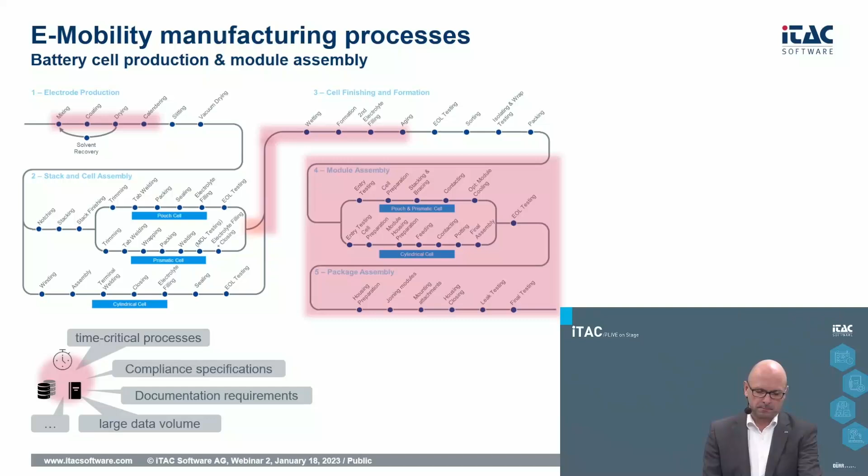Okay, let's have a look into the IoT Edge. I just opened the iTAC workbench, which is a user interface to use the application. I just log in with my user, or a predefined user, and then the system comes up and shows different applications.

I go to the add-ons area, and within the add-ons area we find the IoT Edge. I click on IoT Edge and the software starts. So we are here on the landing page of our IoT Edge, where I have different groups and areas for alarms and so on.

I go to the groups, and there I go to the section for battery production. And as you can see here, if I go into the overview, we see the different processes.

So we have continuous or batch processes, more or less, and you can see here mixing, coating, calendering, and so on. It's a kind of dashboard, and you have an area where you see the previous alarms from the last time.

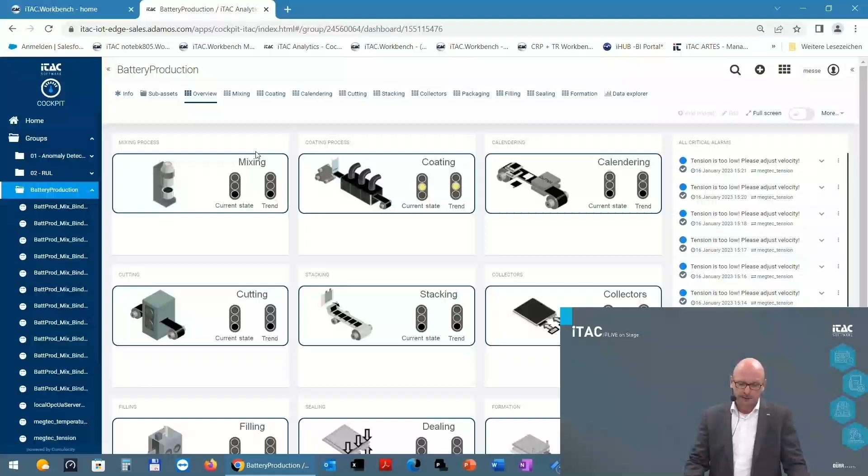If we want to know more details, we can click, for instance, on the mixing area, and there we see the relevant data.

What you can see here are some integration charts and the relevant parameters, like the slurry viscosity, the slurry density, and those are, I guess, some of the most relevant parameters you want to see.

As you can see here, we are collecting the data every second. That allows us, with our device, to collect more than 100,000 parameters or events per minute, which is what you're usually looking for in continuous or batch production.

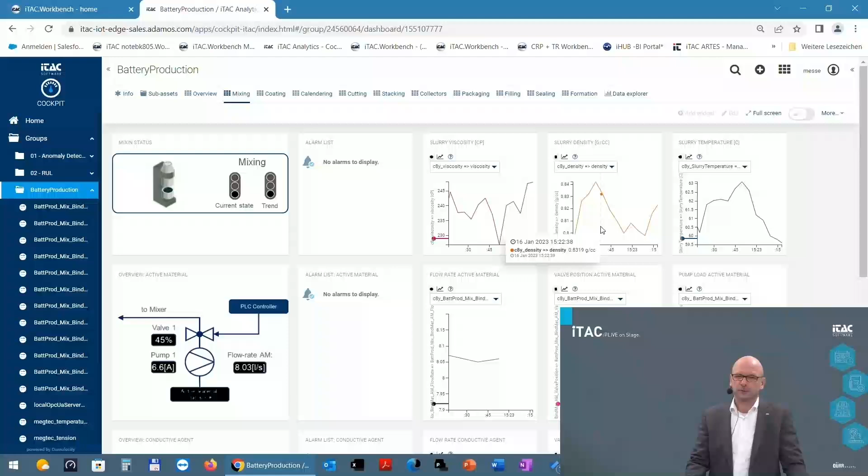You may have noticed that we are working here with a traffic light showing black, yellow, and red. That's due to the fact that we have green screen technology in the studio, so everything that is usually green shows as black in this demonstration. But don't wonder about it, that's just due to the technology.

So right now we want to talk about the electric motor itself and the assembly process, so I will hand over to my colleague Andreas. Yes, thank you, Andreas.

Let's take a look away from the battery onto characteristics of an electric vehicle, for example the electronic control unit and the electric engine consisting of rotor and stator. We can say that these products are already successfully integrated and produced with iTAC. In the following minutes, I would like to show the manufacturing process of these three assemblies and highlight some features and requirements.

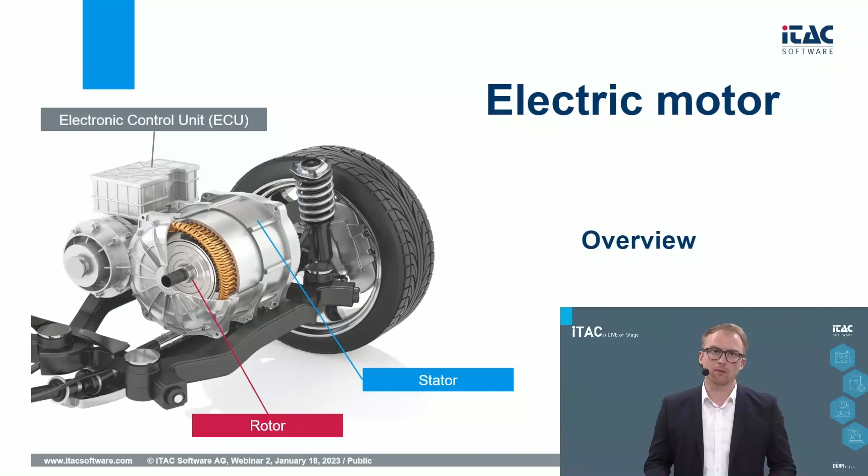What we see here is a generalized assembly flow for the production of a rotor with examples of necessary work steps. Starting with the initial serialization, we can fulfill customer requirements regarding structure and content of the serial number. Usually, company internal guidelines of serialization guarantee uniqueness for the generated ID.

During general assembly, we can identify three different types of components: raw materials, such as the classic screw, nut, and washer; small assemblies that have been pre-assembled by the supplier and serialized; and assemblies that are already being produced with iTAC, where iTAC is aware about the production details of these products.

For raw materials in our rotor line, like the permanent magnets, which are fed to the machine as a bulk material, we prevent excessive batch mixing by only releasing the refill procedure when the reported fill level reaches a dedicated level. Small assemblies with supplier serialization can also be checked via part number against bill of material demands. The existing serialization will be documented in the system in relation to the used master serial number.

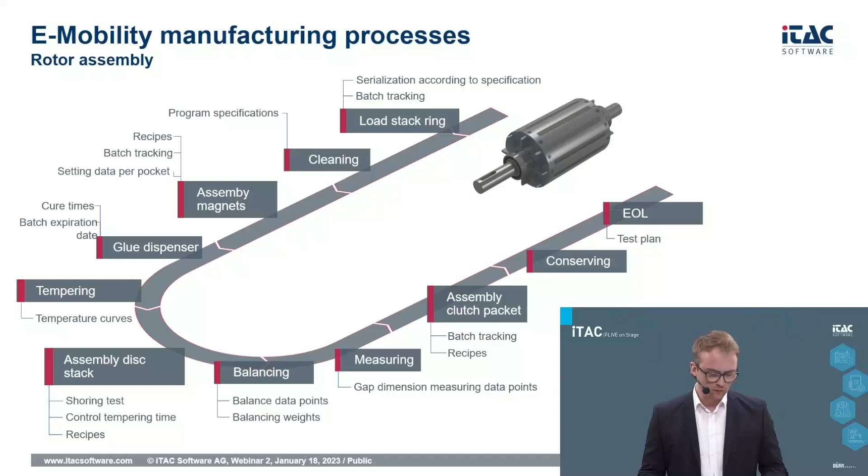Let's take a look at the counterpart of the rotor, the stator. We see similar requirements such as batch tracking and the measuring of temperature curves during heating processes. But also the repeating test and inspection work steps, most triggered by end customer driven quality regulations, standards or certifications. These processes increase the requirements for the implementation.

In future, tools like low-code will be used to create digital worker guidance and ensure the implementation of inspection and test work steps.

In the stator production, as well as in the rotor production, special importance is attached to the specification and documentation of the machine parameters. These so-called recipes are stored in the MES in a document management module and can be read and written by the machine.

Changes by the operator on the machine level are only accepted if the changes are uploaded and confirmed by the MES.

In the production process, special work steps can always be identified that have a particular effect on the subsequent properties of the product, or due to their effect, make disassembly difficult or impossible. These work steps represent milestones and can be classified accordingly in the work plan.

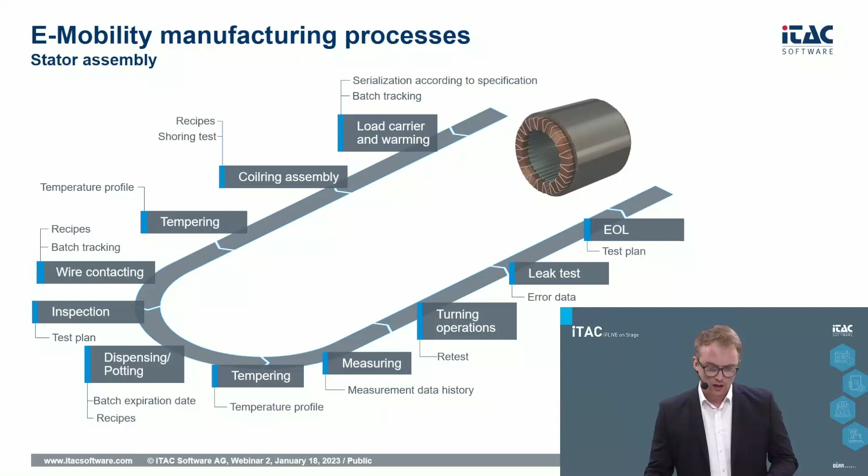If we take a look at the manufacturing process of an electronic control unit, we see a probably familiar process to some of the listeners, the SMT process, where iTAC's integration had its beginnings. One major point is the standardized interfaces with leading machine vendors of this market, which generate a big advantage in integration and communication.

Currently, the integration of such quality evaluation systems has already taken place. iTAC internal solutions, such as the IoT Edge that we saw in the earlier video, can be used, but also the possibility of customer and third-party system integrations is possible.

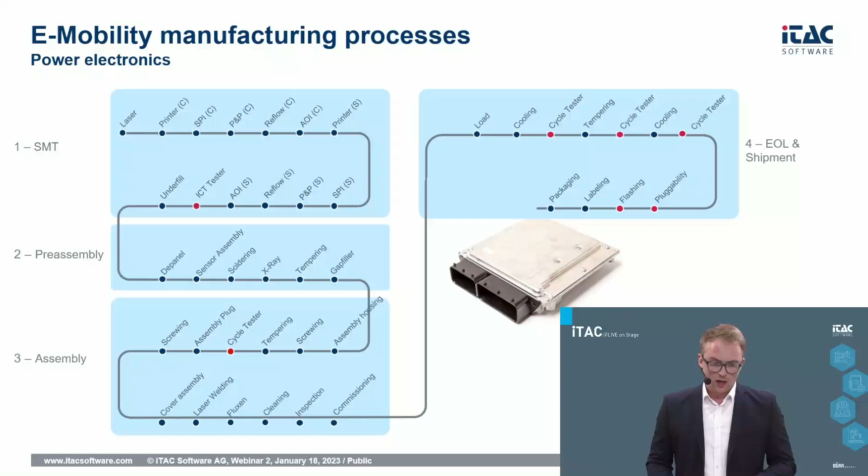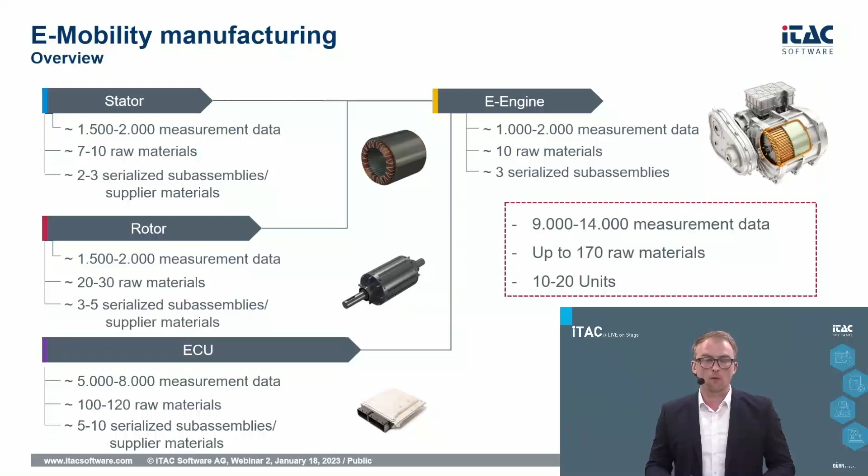Before we take a look at the assembly procedure of such components in the workbench, we will step to the topic of compliance, and I will hand over to my colleague Andreas.

Okay, thank you. Yeah, compliance. What does it mean when we talk about manufacturing process? Mainly we have to talk about the fact that we need to produce according to specification. But what does it mean in detail?

We prepared an example where we have a structure of the e-motor or e-engine. Let's say we have a multi-level serialized production. That is the situation we are facing. If we start with the ECU, then we have for sure several components: the PCB, the IC, the sensor, and tons of other components. All these parts already have part numbers given by the ERP system or by the SAP system.

Such data will be handed over via interface into the MES. So not only the part data, but also the bill of material, the work plan, and the production order itself - it's a whole package. We need it as the base, because that's the master data we need to know - that's the base for us to be able to produce according to specification.

Okay, now the ECU maybe is living, so that means you have to deal with change notes. The change note can be driven by your own development or by your customer, which is forcing a change on the product. That means you have to deal with product versions or revisions. That means the system must handle it clearly and must be able to differentiate older versions from newer versions?

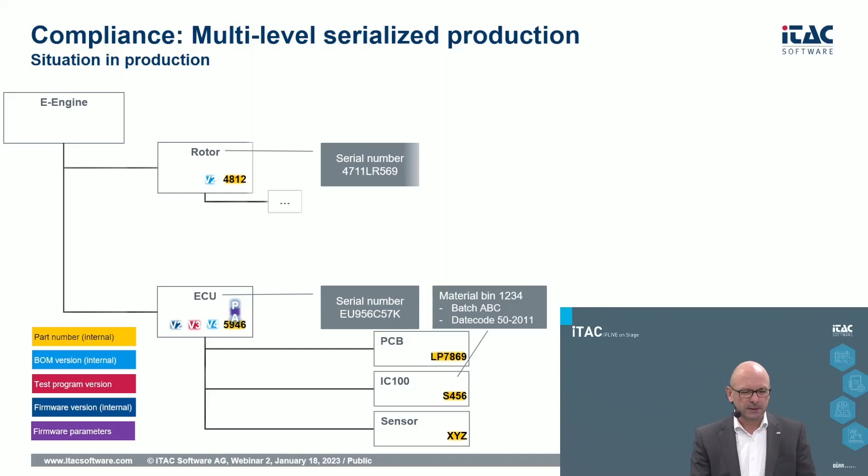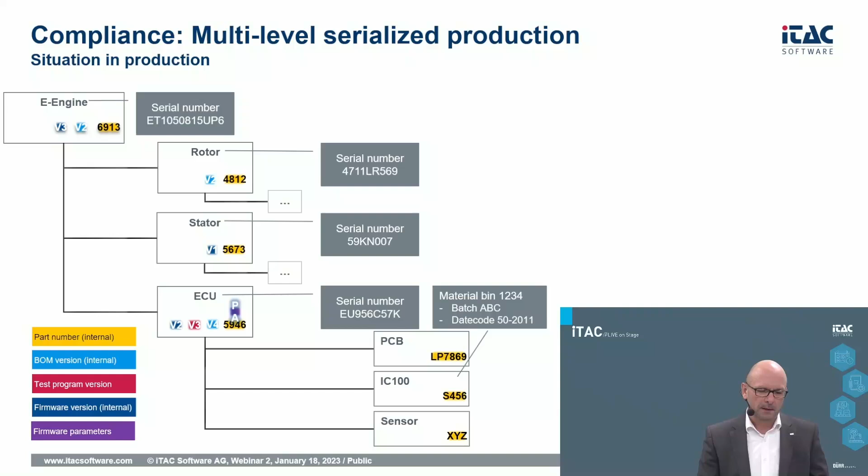And if you look further now at the whole e-engine, we have the situation where we have to assemble the rotor as well - here the same story. We have to manage versions. We have components behind, same for the stator. Also a version which needs to be managed, and on the e-engine level, on the BOM level for the e-engine itself, we have to make sure that only the proven versions from rotor, stator, and ECU can be assembled into the final product, the e-engine. And you maybe have software versions as well.

And what does it mean from the compliance point of view? That means we have to make a setup check - the physical setup of the material needs to reflect the bill of material. So we have a setup verification against the master data. We make sure that we are not using blocked material, because with blocked material you may have a problem with the product. We also make sure within the software that we are using the correct test version, and that the correct firmware version will be flashed at a certain station. The correct production parameters, which we provide for certain stations or certain processes, are relevant and will be managed by the system.

And for manual processes, we can provide the right documents for the operators for the product. So we make conformance happen automatically in a highly integrated environment, and also for manual processes.

Let's assume the ECU has been produced in plant A and the final assembly will be done in plant B. That means we have to manage the status for the sub-assemblies and the final assembly, ensuring that master and slave serial numbers both pass before they can be assembled and used.

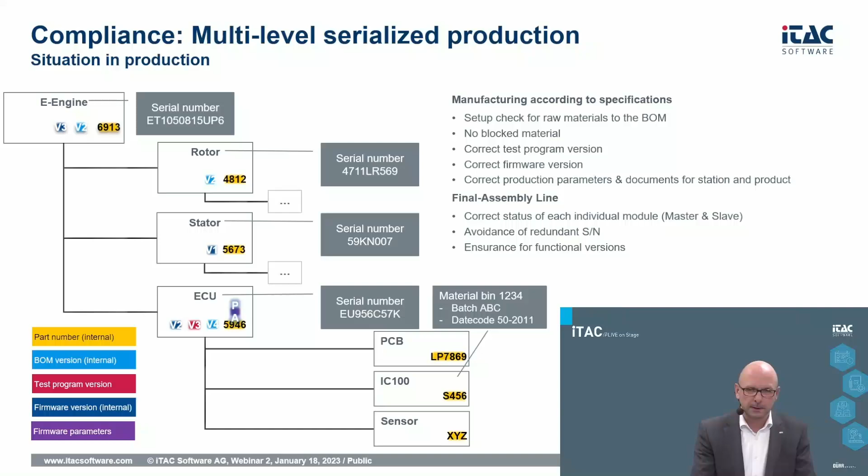Okay, now I want to hand over to my colleague again, to Andreas. He will show in our iTAC workbench how a manual process can work. Thank you, Andreas.

Okay, we are back in the iTAC workbench. The workbench is our HTML framework for standard and customer-specific plugin modules. These plugin modules can be used to create applications in a service that can be reached by the operator. For example, here we will today use the HMI module, and we will start with the TR module.

In the TR module, we want to go into the unit history for a serial number that I already prepared. This serial number should display the E-engine, and as you can see, there are already booked work steps available in the history.

I already merged the stator and the rotor component to the master of the E-engine. You can see here the entries serial number rotor, serial number stator, and we have an additional entry that displays the product level merge in the rotor line, because the rotor line has 2 work order levels.